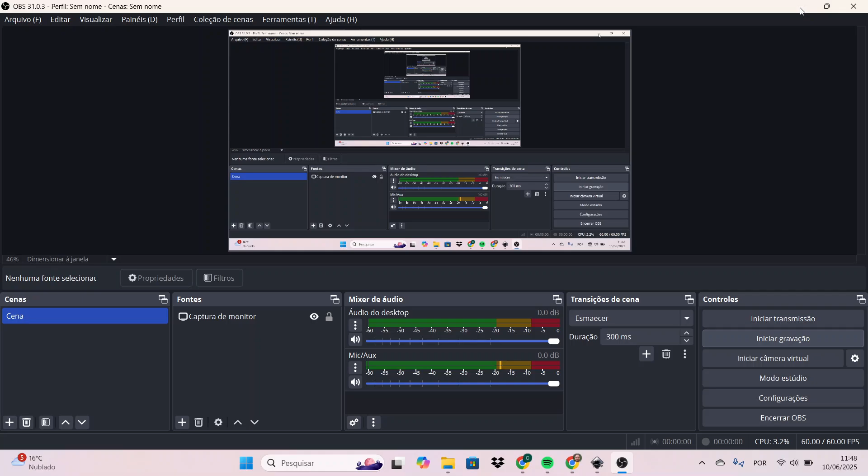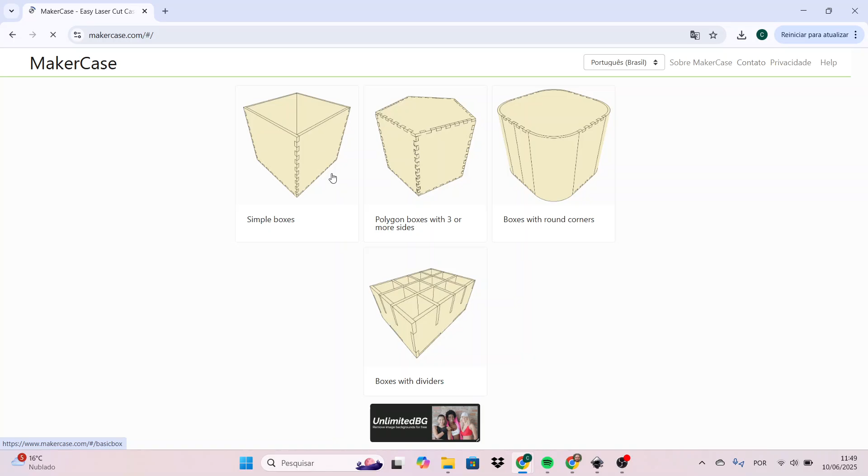Okay, everybody, so I am going to teach you now how to use the Makercase website to create casings for whatever project you want. Let's start out by going into the browser and typing makercase.com. Once we have makercase.com working actively, we just have to select what kind of box project you want to do, which is if you want to make a simple box, a box with three or more sides, boxes with round corners, or boxes with dividers. Let's go with simple box for now.

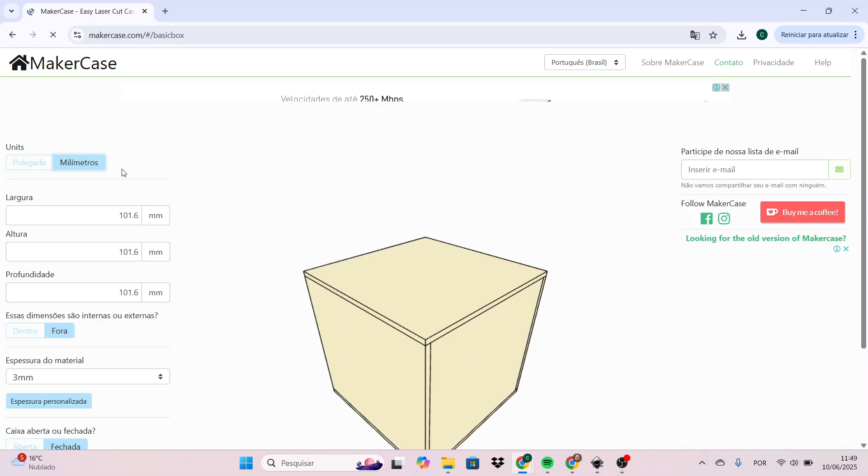And once we have that working, we're going to choose millimeters as the unit, okay, and define the size of the box. So if I want a box that's 200 millimeters wide by 50 millimeters high and maybe 150 millimeters deep, I just have to type those measurements here.

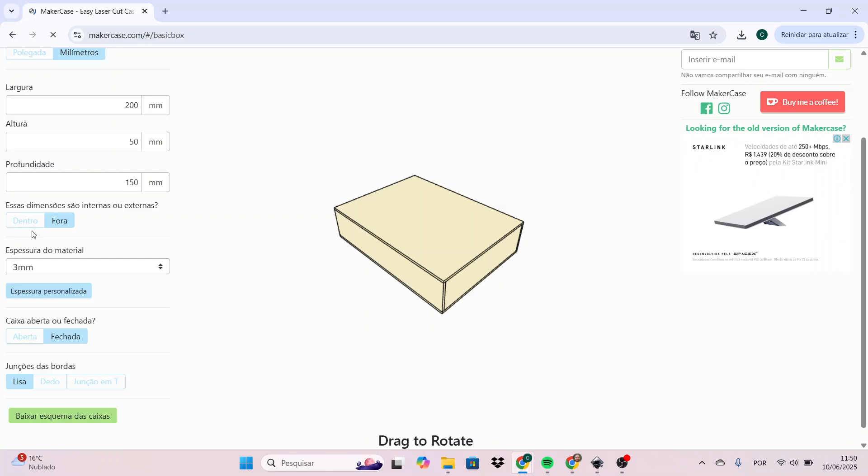Then I'm going to decide on what the thickness of my material is right here. We should set it to whatever material we're going to use. And if we're going to use 3 millimeters, which is the one that we're going to use in principle, that's what we should choose. Okay. Then we're going to choose if we're going to have an open or closed box. Let's start with open for now.

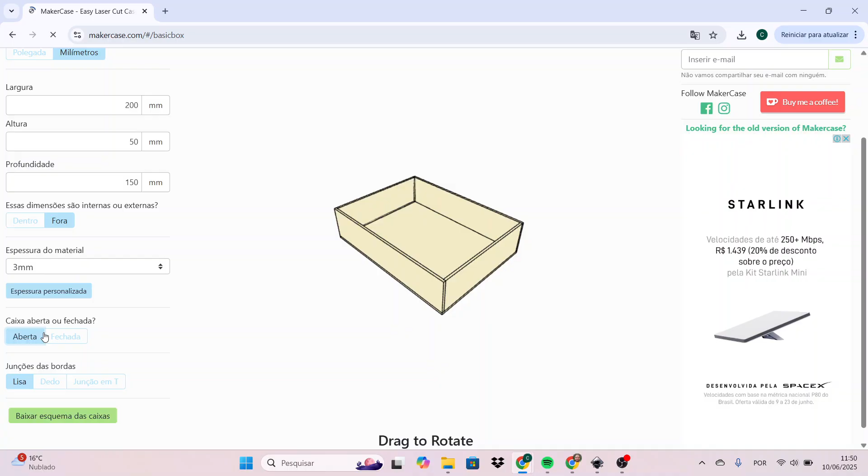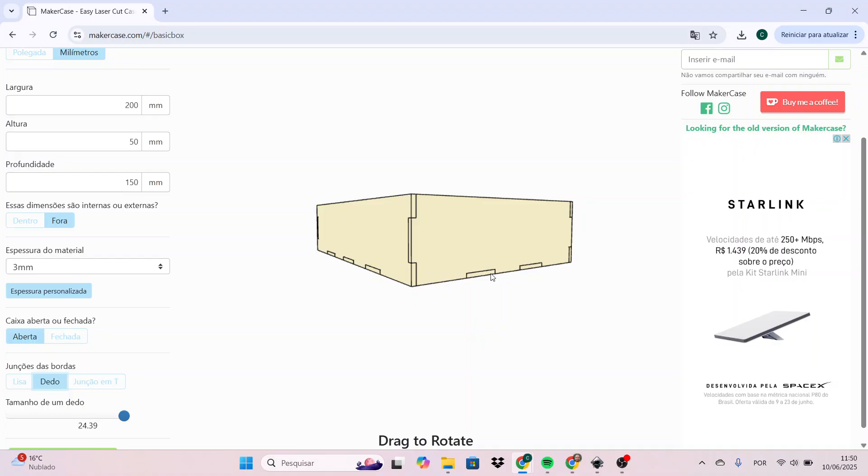And if the joints of the borders are going to be smooth, finger jointed, or T-jointed. And in this case, we're going to go with finger jointed. Finger jointed means that we're going to have these little fittings. They're going to be the way that this box is going to fit together nicely, right?

So here you can slide this attribute to define how big the joints are going to be, and that's going to define also how many of them there are going to be. So if you slide to the right, the joints are going to be bigger. And if you slide it to the left, it's going to be smaller.

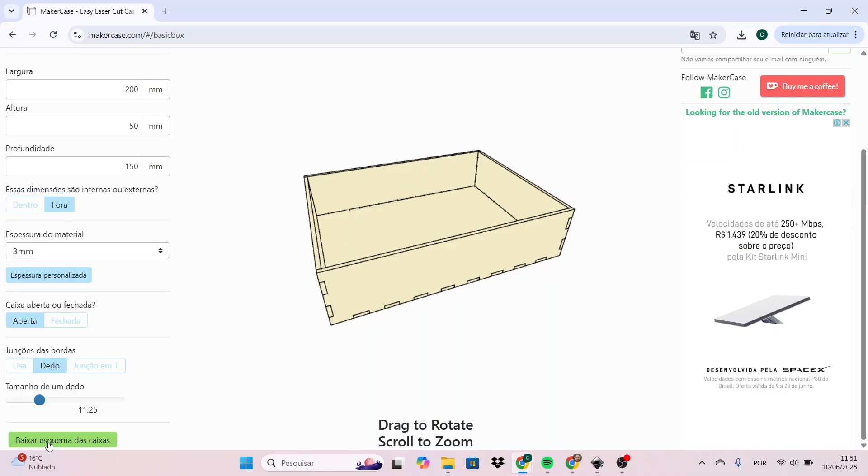All right, so that's it for now, and I hope you guys find it easy to accomplish that. Okay.